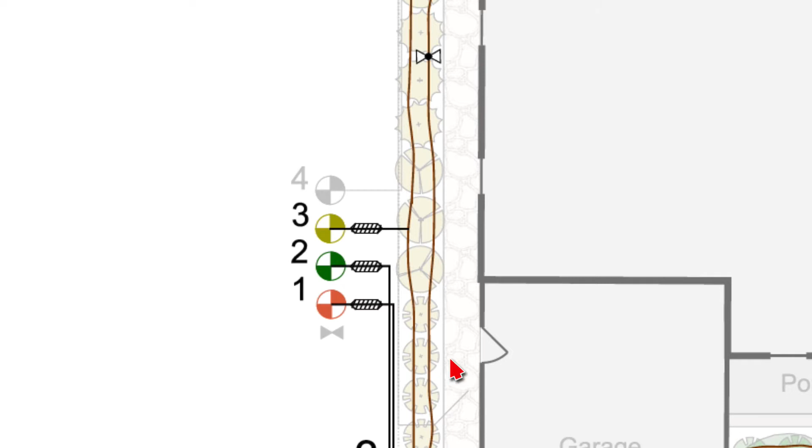In this video, I'll be explaining the drip system and showing you the parts that make up the system. Let's go ahead and start down here at the valves. The valves are over on the side here. Zones 1, 2, and 3 are the drip zones.

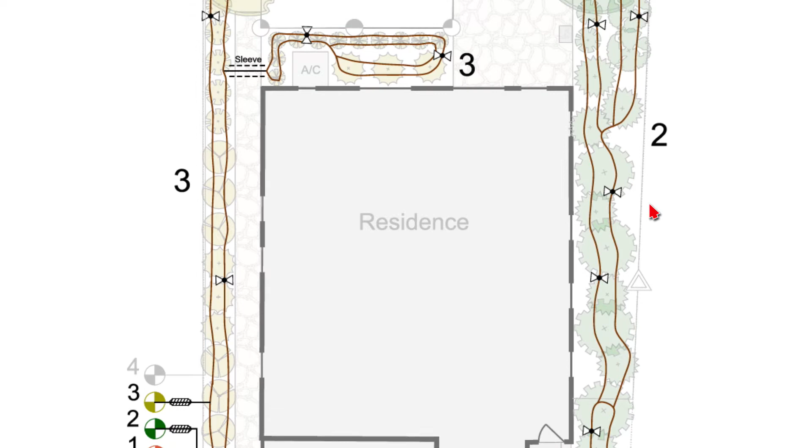If I come up here, you can see this rosy color of the plants. The plants are color coded for their individual zones. Zone 1 in the front yard, it's moderate water use plants, so we've separated them out. Zone 2 and 3 are low water use plants, and you can see how the color coding separates the zones from one another.

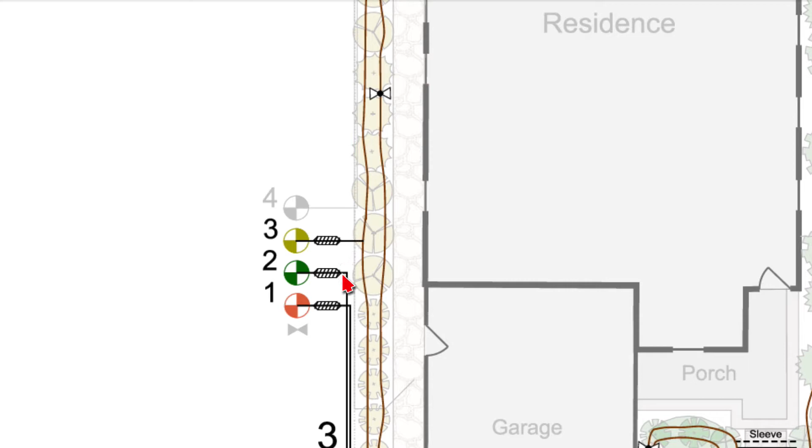Over here at the valves, we have the drip pressure regulator and filter that is directly downstream of the valve. And then you can see that we have black tubing that comes from the valve and runs to the particular area. The black tubing is blank polyethylene tubing. This means it doesn't have any emitters either built in or punched into the tubing. And we run this blank tubing in places where we don't need to water plants.

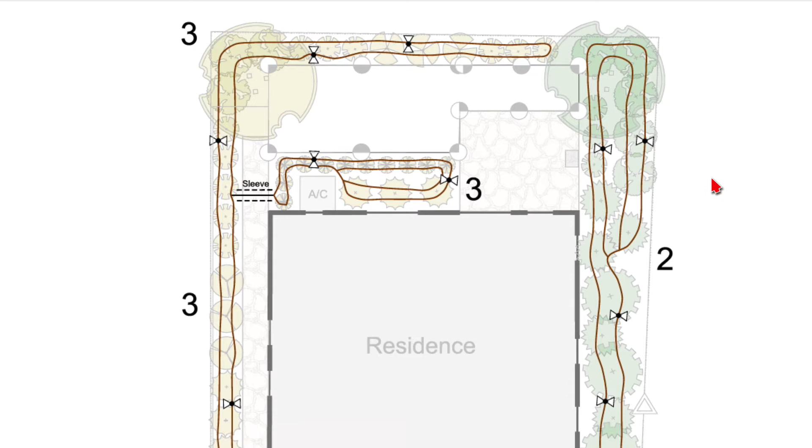So for instance, number 2 is running along here, and then it runs underneath the driveway, and then it comes directly over here to the number 2 area here. Goes across under the driveway. So the black tubing is blank tubing, no emitters, and the brown tubing with the squiggly lines, that is the Netafim tubing. And the Netafim tubing has 0.6 gallons per hour emitters on it, spaced every 18 inches.

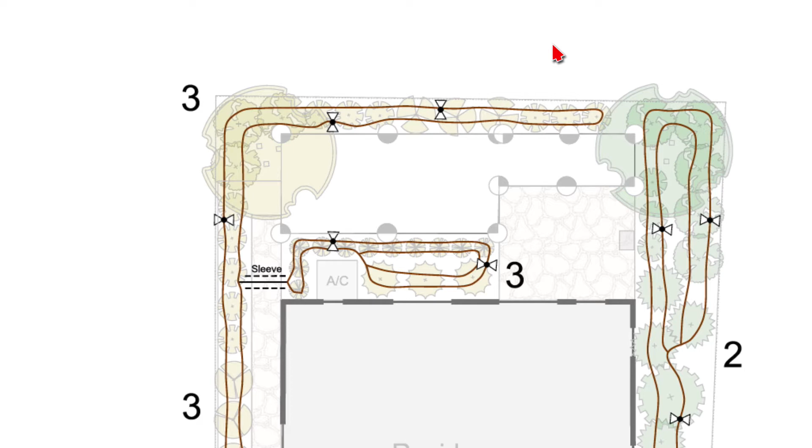And the way we manage that is every plant gets the drip tubing, the Netafim tubing, on each side of the plant. So let's go ahead and zoom in on an area here. We'll look at this area. You can see that each plant has the tubing running on both sides of the plant, and this provides even root growth for the plant.

And you can see also that the tubing has an organic shape to it. It just sort of squiggles and snakes along. And when you have the tubing so that it's a loose grid like this, you can easily move the tubing to different areas as the plants grow.

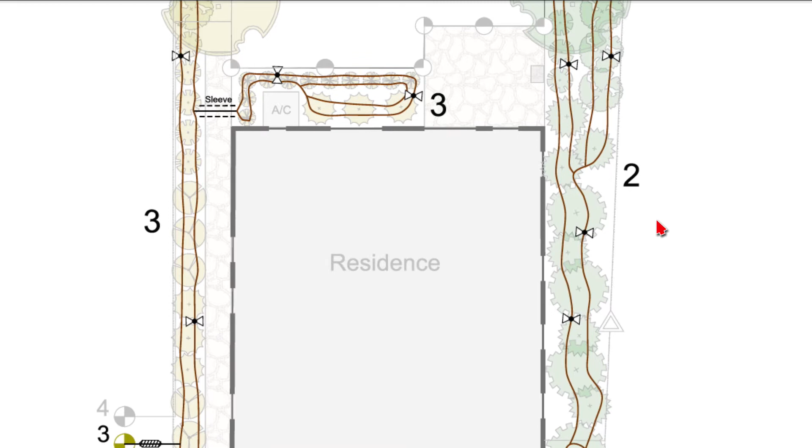We do need to grow drip systems as the plants grow, because when the plants start out brand new, you need to have the emitters much closer to the root ball because that's where the roots are. And then as the plants grow, we can move those out, move the drip tubing out, away from the plant.

The next thing I'd like to point out is, I'll zoom in on this area down in here. Number 1, you see all these little white bow tie things. These are flush points for the drip system, all of these bow ties. They're all over the place, really. And there are many flush points because this is a closed system. It's all a closed loop to help with the pressure and the delivery of the water.

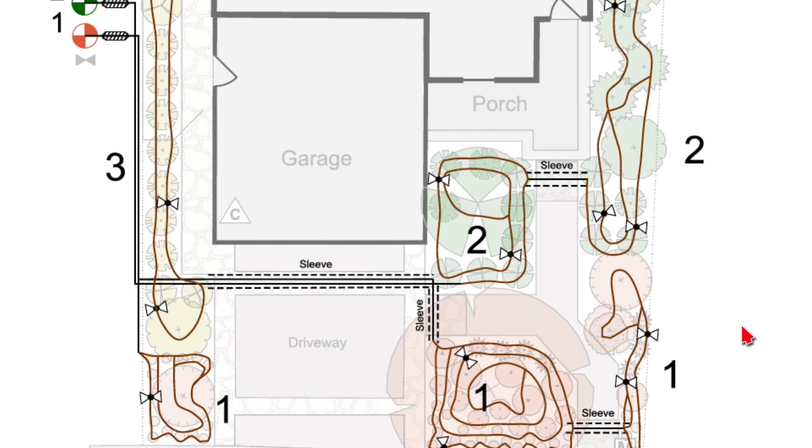And we put in these flush points so that you can flush the debris out of the drip system. And we do recommend that you flush drip systems about once a month. And I'll be showing you photos in just a little bit as to what the flush points look like, and the parts that you can use to make that happen.

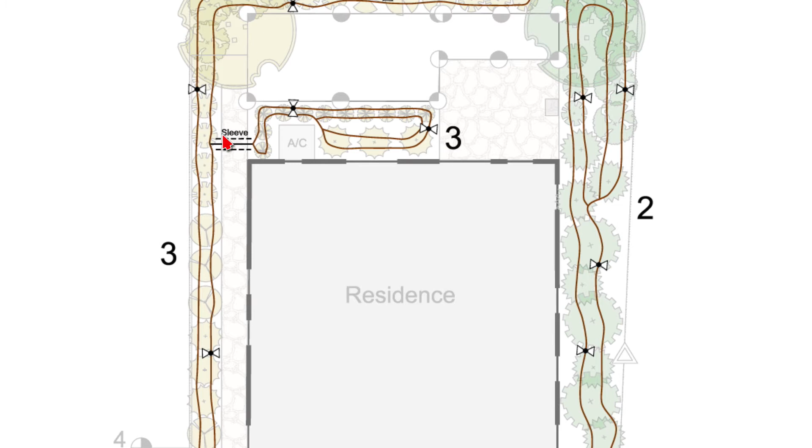Also, you can see that underneath the hardscaping we have a path here with a sleeve. We have a sleeve under the driveway, sleeve here, sleeve here. I believe there's a sleeve in the back as well. Anytime you need to run drip tubing underneath hardscaping, you want to use the blank tubing with no emitters. You really don't want to be watering underneath concrete and other hardscaping and paths and such.

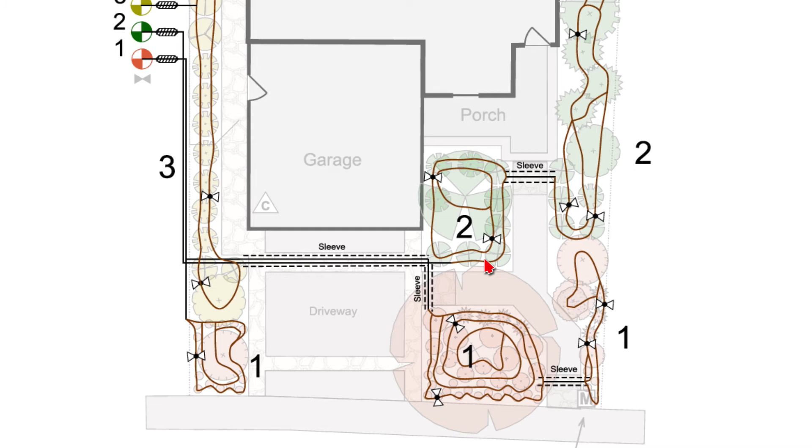So the sleeves indicate where you would tunnel under. If the walkways are existing, you could tunnel under and put in a fairly large PVC pipe so that you can run anything really underneath these hard surfaces. We usually use anywhere from 1.25 inch PVC to 1.5 inch, and sometimes we even use pipe that's large enough for drain pipes.

So I think that's it for the drip system to show you. Let's go ahead and go on over to look at the photographs now.

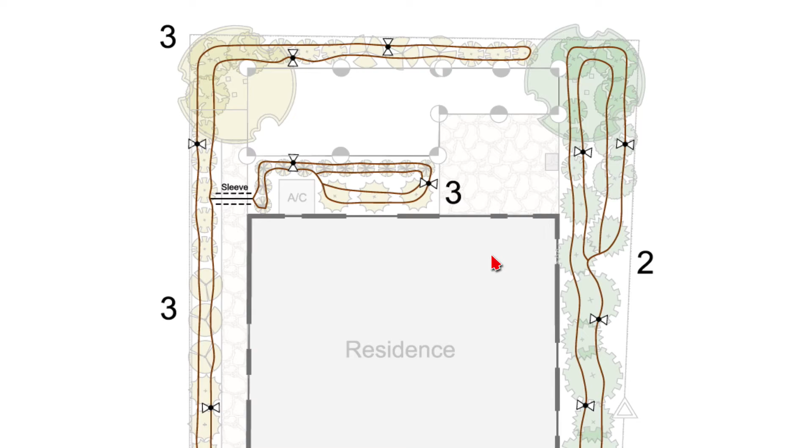And the drip system is set up so that the system is in place for the mature sizes of the plants. So then if you plant the plants new and they only need a couple of emitters on each plant, any other emitters that are around the plant can be plugged by these dripper plug rings. And we've specified many of those to plug up the emitters that are not needed in the beginning. It's a very useful thing for water conservation.

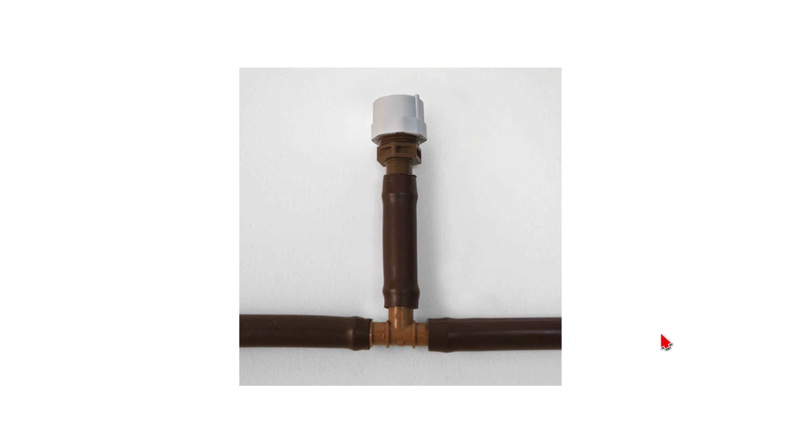This is that same flush point, only all the parts are put together. By the way, all of these photographs are on this drip page, so that you can see them other than watching this video.

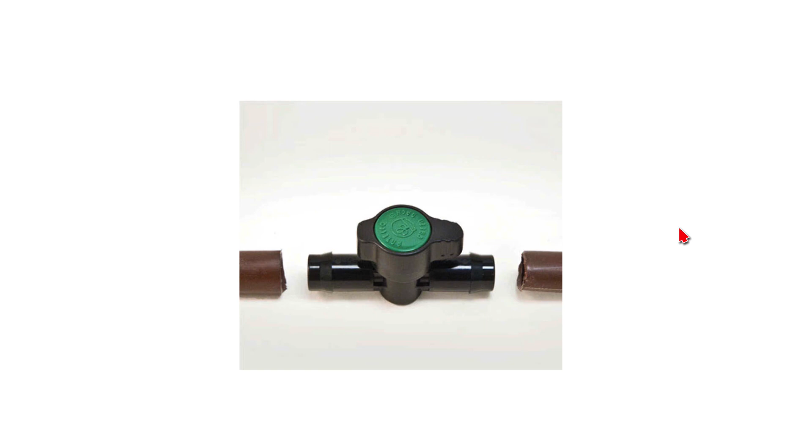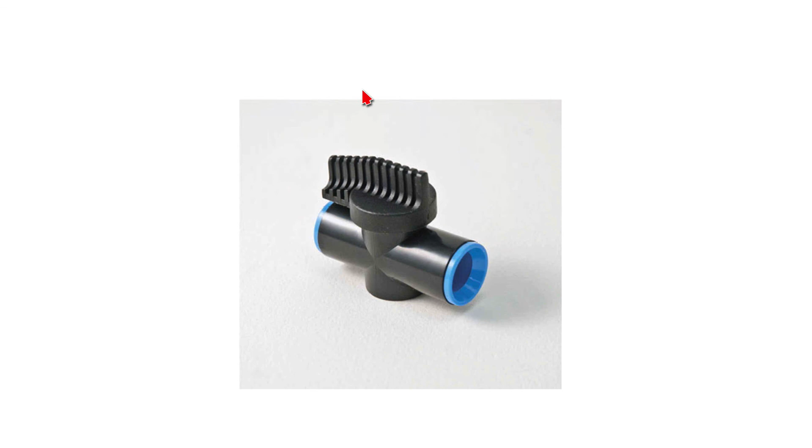Next up is a shutoff valve for drip. The Wholesome Habitat plan calls for shutoff valves for the veggie beds. Here's one and here is another. This one is the one that Netafim uses, that they send out. It's an Antelco shutoff valve. And then this one is a standard compression fitting for shutting off a line on any part of a drip system, really, whether it be a veggie bed or anything else.

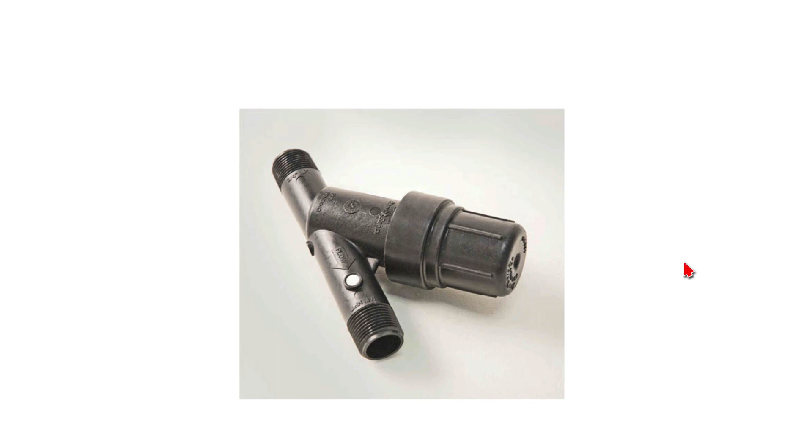And then the last photo is the Rainbird filter / pressure regulator that goes directly downstream of the valve. Every drip system must have a filter and a pressure regulator. The filter is inside here, and every now and then you want to unscrew this area here, and you can just pull that filter out and wash it. And then this part here is where the pressure regulator is. It brings it down to 30 psi.

This is really great because it's a filter and pressure regulator all in one unit. Before, we had to buy two components and screw them together, and now they're making these with the filter and the pressure regulator in one unit. So this concludes the drip video.